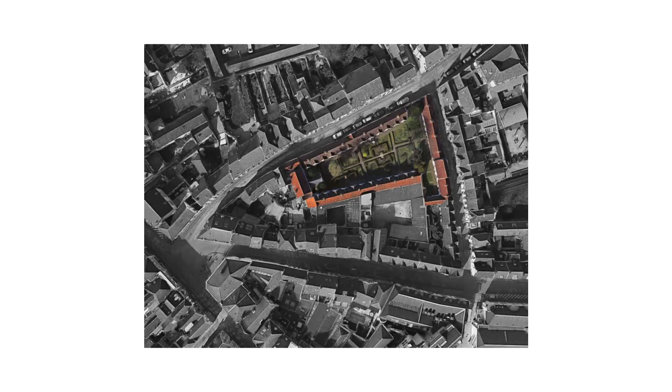But within that city fabric, within the urban block, is carved a space, a very calm space, a very strong space. So it's at once part of the city, and at the same time it's something which is quite unto itself. It's a kind of city within the city. And here's another example of this idea. This housing scheme in Brussels has a kind of wholeness, a kind of connected, collective sense of one.

And I think in my mind it's a kind of promoting the collective above the individual, without denying the individual a sense of, let's say, special individual character. And this is quite something in cultures like the UK and Belgium, nations where a sense of individuality is held very strong. City of houses, both London and Brussels, cities of houses.

Perhaps it's a different idea in places like France, where the collective was somehow much more recognized in the 18th century than it was in our country. The idea that people know they have to organize things in a way that serves everybody. I touched on this, but this theme is really about tolerance. As architects, we design things, we fall in love with them. We can be rigid sometimes, like I don't want my project changing in time. And I really like this photograph because, as you see here, it's a set piece.

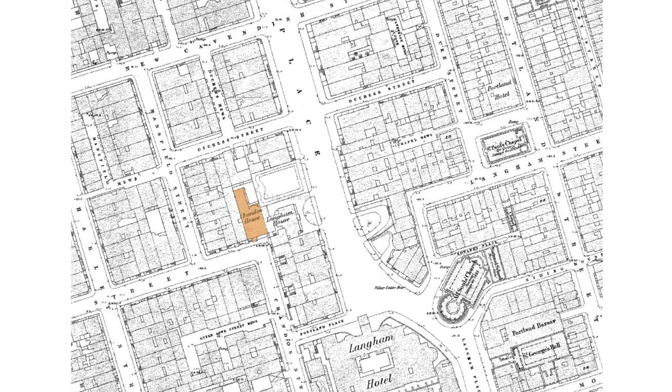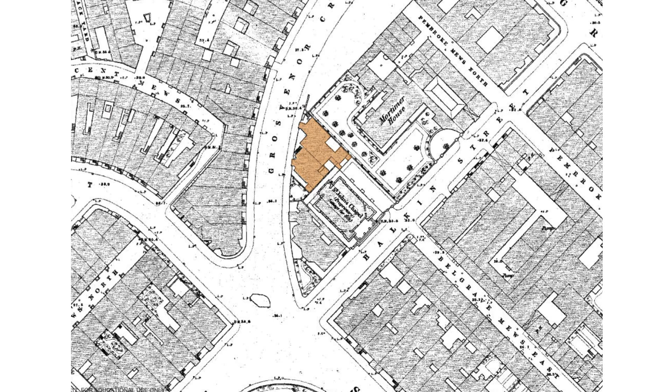And I would describe the way in which the facade has the power and the possibility to give direction. It tells you something's happening at the end of this street that's not what you might think. Here's another example, the Belgian Embassy in London, where when you see this plan, you see how the building is part of this more or less grid of building forms, but is then cut by Grosvenor Crescent. The architect was looking for ways to adjust his building to the street, and he does this just by this very sleight of hand turning of the porch. So these are not big ideas, they're obvious ones, simple and subtle touches between the act of building and the city.

And then I just wanted to also say that sometimes buildings can give our cities things, and Alberti knew that in a way. It's wonderful. I'm sure you all know this building, but the wonderful way the pilasters drop down onto the plinth, and the plinth, of course, is part of the pavement and the seat.

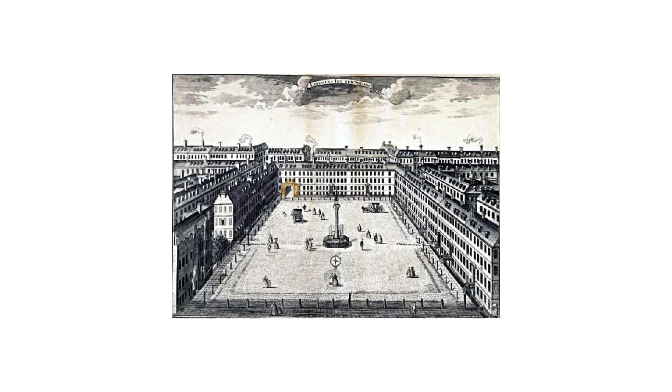This is a very nice urban example of architecture gifting the city something very special. This is, if I just go forward 2 slides, part of the law courts in London. So you have this great, beautiful court. Then in the corner, you have a little passage that connects to the rest of the city here. And here the architect, regular Georgian facade installed. There's a bookshop, and the bookshop is essentially a lining to a passage.

And it's very clever, really, because it's sort of obvious, but clever, I think, because the passage is gifted, let's say, the presence of luminance at night and its interest, you could say. And the bookshop is given this fantastic decorative entrance through this otherwise very ordinary piece of London facade.

And then, almost finally, well, lots of architects have used this phrase with these two words, but I like this, and it sort of feels like it should be of our time. We live in a period of gross excess and vulgarity, and I think practicing architects today, we're confronted by the problem of having too much on our plate. Materials in the 19th century, the 18th century, you would build with brick if you're in London because that's what you had, and you would make sash windows because of that.

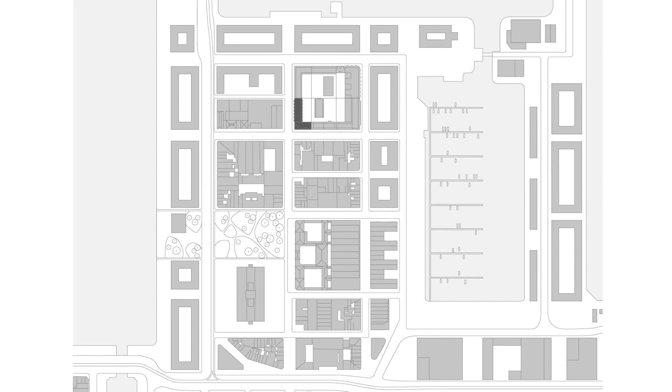And there was a very nice master plan produced in 2001 that sought to somehow hold on to the spirit of this dock workers neighbourhood. So here you have the dock and the other dock, and the centre of the city down off the bottom of the page. And we won this competition to make a building, a corner building. It's an urban building. This neighbourhood is not the most amazing architectural place, but it represents, I suppose, a time when warehouses or storage buildings were more than simply boxes.

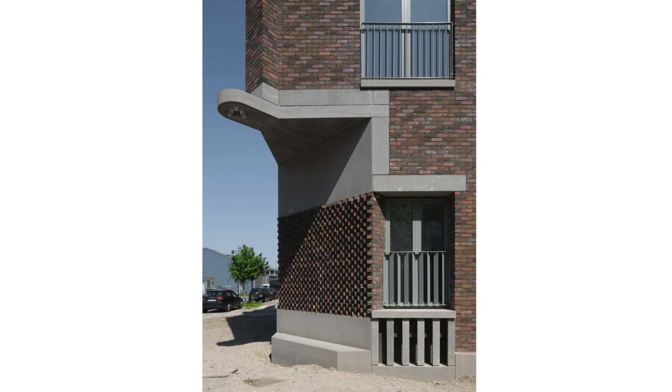They had a pride to make something with the simple facades, and these pictures just give a sense of the existing place that was undergoing a lot of regeneration, a lot of new buildings, a lot of architects working in this neighbourhood. And we like the really gritty nature. It reminded me of Tribeca in New York in the early 80s, these cobbled streets, these very wide streets. The light is really sparkly because of the light on the water. And then these somewhat disused buildings. So we got to work on this housing building.

It's essentially an L-shaped building, so it occupies the southwest corner of the block. It's essentially a series of houses, 3-story houses with 2-story duplexes on top of them, and an apartment building here entered from the corner. And the transition between these two typologies comes together in this seat and this light for kind of teenagers hanging out or whatever.

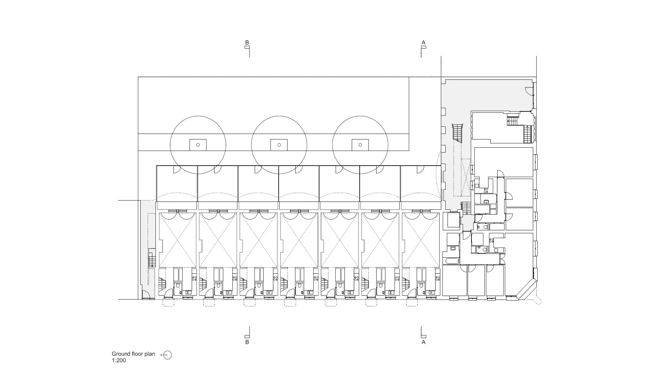And really, this seems obvious, but we were not asked to make entrances on the street. The brief actually was for an apartment building, but one of the things we enjoyed doing was to try to make a series of houses with front doors and kitchen windows, and that the pavement comes directly up to here. It's not quite finished in this photo.

So what you're looking at here is a series of 3-story houses with duplexes on top. And there's an interest in my office in finding a way to take this program and compose it in a series of arrangements. So what you're looking at here is actually the expression of a 2-story volume behind this facade. Two tight levels. You see it clearly in this section right here.

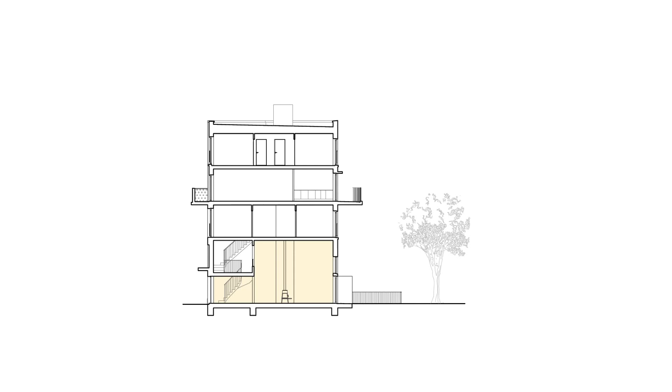You see, so there is the street with the canopy, and then you have a kitchen which is very squeezed, and then this big space at the back onto the garden, and its bedrooms on top, little study room up here, and then another duplex up here, accessed from the deck. They hate deck access in London. You're seeing an image here. It was very difficult to convince them it could still be a nice thing, because deck access had a lot of bad press in the 70s and 80s.

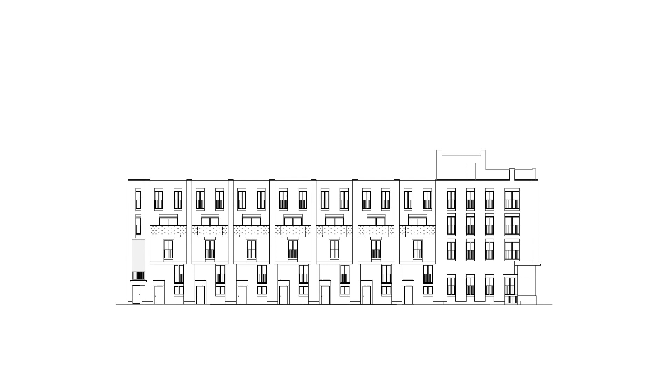So you're looking here through this double height space into the garden at the rear, and the entrance through to the back. So here in this long elevation, you're seeing these houses. These are 3-story houses, duplexes, then returning to the corner.

We like to work a lot with models in my office, as my students here have seen this week. I like to make models myself still. I think it's an important tool for architects. I know it's not very fashionable anymore with the use of computers, CGIs. All my friends say to me, why do you bother? Because you can do the same with CGIs. And you kind of can, but there's something about the process of making and thinking that's slow.

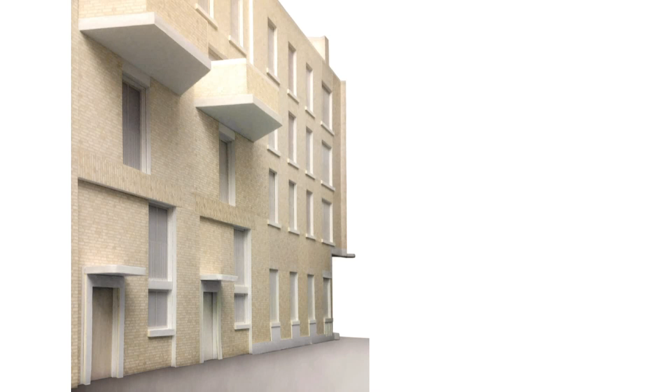And we're all having to work so fast these days. I like the idea of making and changing your mind, and also looking at models is very different to looking at a one-point CGI. Now, I know you're saying, well, you could do a video fly-through, but again, I think there's something very special about holding a physical thing and looking at it from different vantage points.

So this is a view of the building on the corner, where it transfers from houses to apartments and rises to a series of apartments on the roof with this, you could say, castle-like top. So it's a city building that's trying to, in a way, gift back to the city something in the form of this. I mean, I have to, you know, acknowledge the Amsterdam Dutch School.

A bit louder? How's that? Is that better? Is that better? Everybody, wave. Can you hear me at the back? Wave if you can't. Good.

Amsterdam Dutch School. I'm not going to go there just now. Right. So, more of that. They were amazing architects, in a very brief period in history, and they worked a lot with models, and the way they shaped form out of brick was, for me, one of the most extraordinary periods of 20th century architecture.

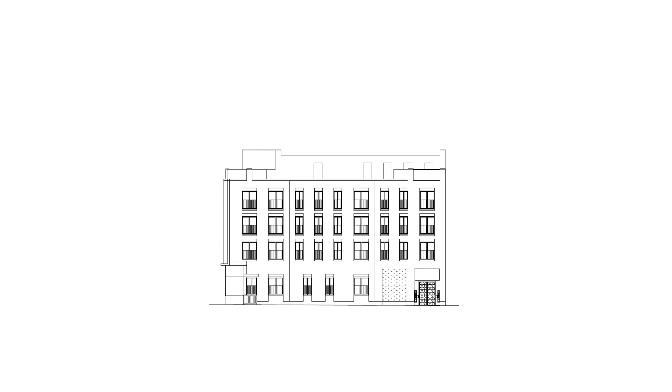So here you're looking at a drawing. I still love flat drawings and elevations and plans. In the school where I teach in London, it's very unfashionable to make two-dimensional drawings. But they say things to us that 3D images don't, I think. A plan can contain ideas that an image doesn't. Somehow you can thump an idea forward with a plan. I'm not saying it's the only way, but it's certainly still a very important way. My colleague said it's a bit tedious to show plans in lectures. But anyway, I won't leave it on the screen too long.

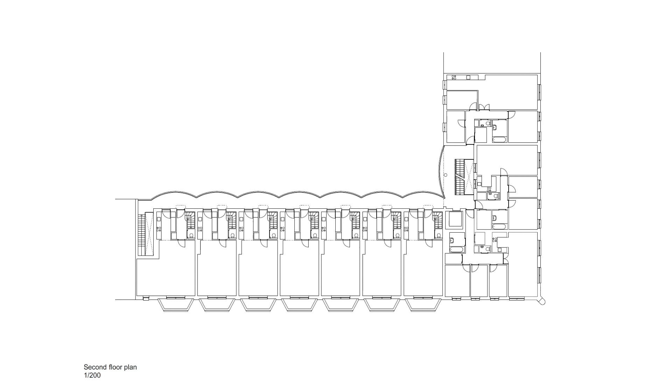But this is the plan at the upper level. You saw the plan at low level. And at the upper level, you see this deck access feeding the first level of these duplexes. And there's a view of it. And looking back into the apartment is access from a kind of Golden Lane style, generous deck space.

And the idea about these, that's looking back there, the idea about these decks is they're very deep. So they not only give access to the apartments above, but, maybe if I go back to this, in plan they belly out in this manner and allow a kind of swelling in front of the entrance for a kind of informal appropriation of the space. So there you're looking down at the back of the three-story houses.

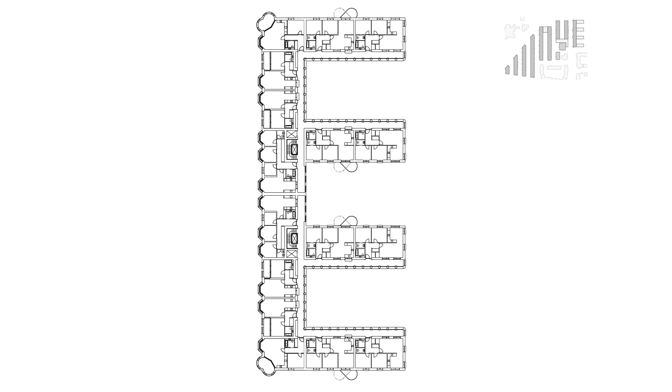So I'm going to race through this one. At the same time as doing this project in Belgium, we've been making this master plan. My office is doing very small projects, but also large-scale master plan projects. And this is a master plan for a part of London up here. It's called the Nightingale Estate. It's a project that seeks to make streets and squares and terraces. It sits here in Stoke Newington in London. It has a little square here and a big square here.

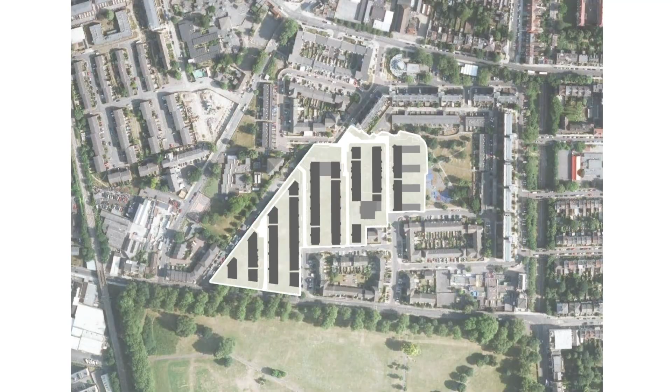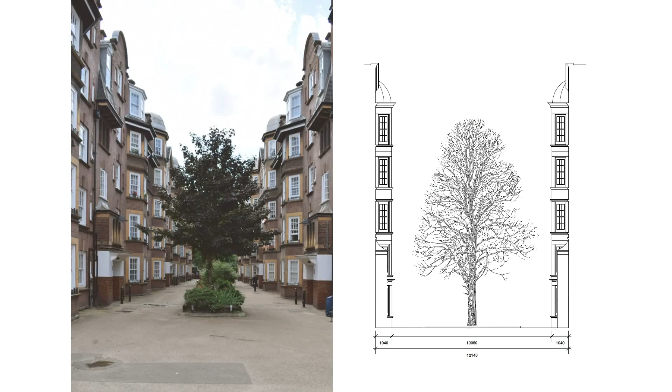I have to say, there was a great period of mansion block building around the turn of the century, when London's developers and politicians were looking to increase housing, and in some ways it's looking at this period. These are some very beautiful mansion blocks, it's called the Samuel Lewis building. But the site that we had used to have these towers on.

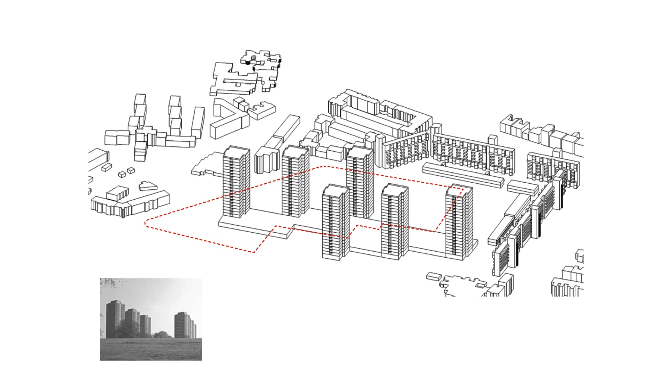Actually, they were not bad, these towers, but there was a lot of crime and trouble on these estates, and they became very unpopular, and the politicians decided that they have to be taken away. But the new project should seek the same quantum of development, but without towers. So this was before I got involved in this project, because I might have protested, this is not very sustainable to knock buildings down like this. So they were taken away.

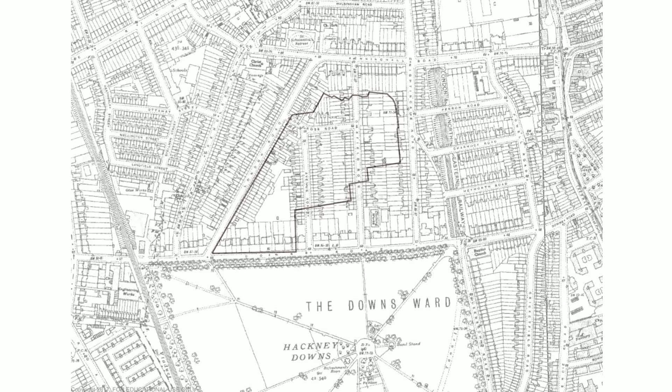Here is this site. It's in the London Borough of Hackney. Here's the City of London. And it's interesting to look at this piece of city. At the turn of the century, it was already a very dense part of the city. This was bombed during the war, and the towers that you saw were there. And so I suppose in a way our vision in this project is to return to a kind of tight grain idea of, let's say, a distinct piece of city.

The existing site is very characterized by a great variety of building types, everything from towers to slab blocks to small terraces. And what we felt this project needed was something very clear and strong and coherent, even though its edges were somewhat irregular and arbitrary, just given the plot. We thought it could be a new vision for how all this would develop in time.

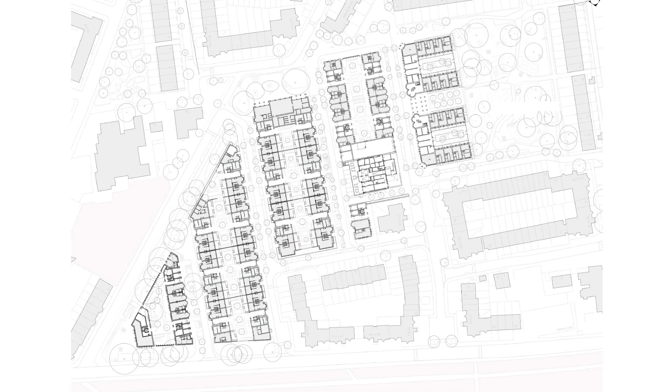So it's essentially quite an unforgiving series of north-south streets, meaning the apartments get east and west light, with south faces here onto the park, and then a building that has these east-facing gables onto this little public green up here. And some of the ideas that I was showing you in Antwerp are at play in this project, in the way that this is a primary route through the estate.

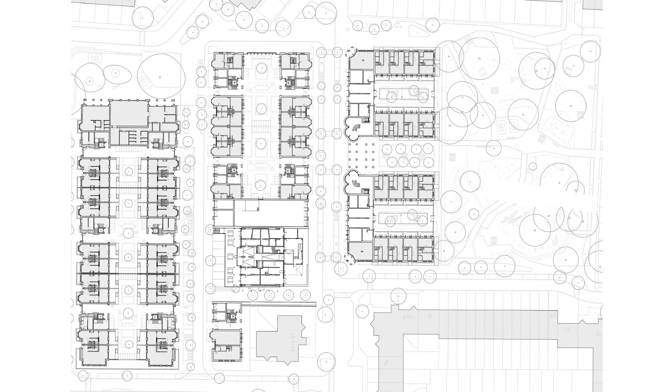But by the way, one tower, I didn't mention that, but one tower had to stay, and there is this weird absorbing of an existing tower here that's then held and contained within this block. But a principal route, the building here is orientating east to this park, making a series of little courts here, a series of little articulations. This is a public route through, whereas these are semi-public.

So on the outside of the block, I said it's north-south, and so you don't see it in this plan. There's a series of bay windows down this side, giving a kind of southern orientation. So again, using models to study these pieces of architecture.

Here we have, we've been talking about non-referential architecture the other night, and this is really the opposite position, and somehow everything's been done well before. As a new generation, I don't see how we can help but to kind of touch it.

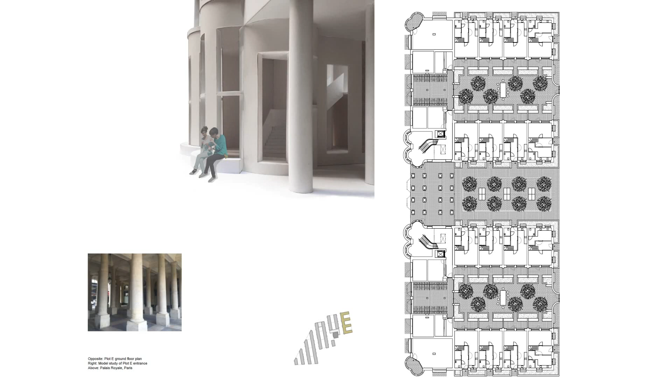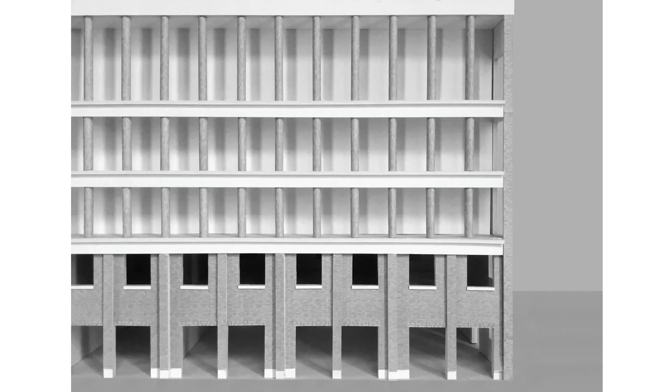And so, you know, this is the Palais Royal in Paris. This is my Palais Royal moment through to the garden here. It's the outside of the block with balconies and corner articulations. This is a cross-section you see in this diagram here through one of these courts. So this is a bit like the Belgian project, a series of two-story houses with a series of apartments on a kind of gallery deck here.

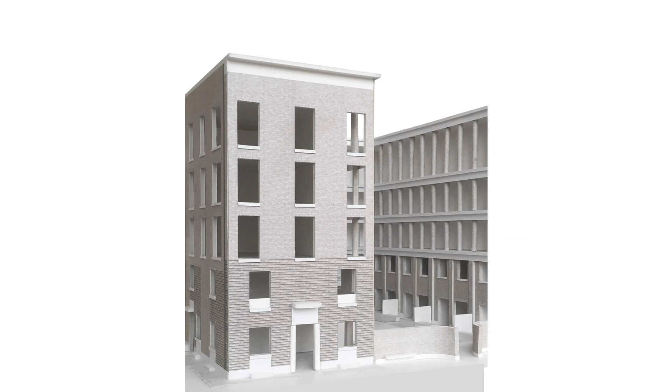This is looking through. These are all brick buildings. These decks are very deep and they allow informal occupation. So there's the elevation. So I'm really just focusing on one of the buildings in the master plan, the one that orientates onto the little square here.

And there's a view looking onto these gardens. This is a semi-private space belonging to these residents. So you have two of these that sit next to each other, and in this model you're seeing two, but there are four of these gables that orientate here onto the park.

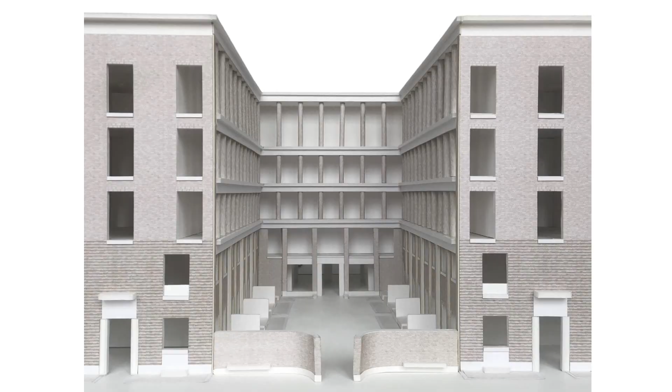Connected, similar. This is a different project, but there's a lot of the same themes at play. It's a master plan and the development of 900 homes in part of North London. It was a commission we received 2 years ago. It's a commission that we are collaborating on with two other practices in London, Sergison Bates, Allies and Morrison.

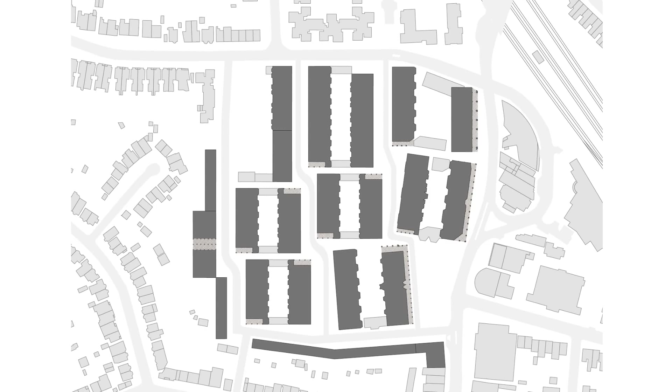And so what we're seeing here is a theme in the master plan about the way buildings react to junctions. So it's part of a big London-wide mayoral study. We have a major housing crisis in London, and this will be one of the sites that is there to deliver a large number of housing. It's right on the railway station, so it's 10 minutes here to Euston.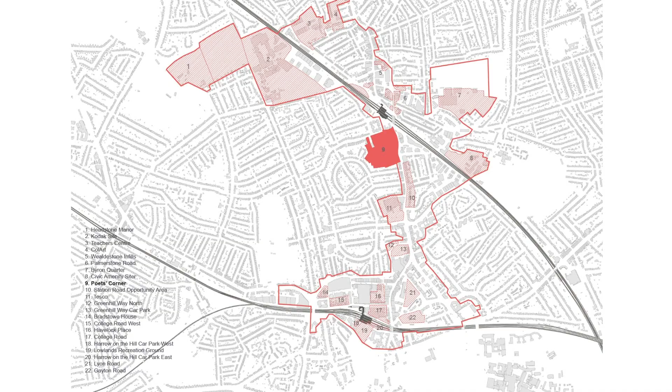So because of that, it's classified as a site that should take a much greater density than it's had in the past, because what you see around here is really a kind of suburbia. So it's also a kind of city within the wider city, and the characteristic of this city is predominantly 5-story

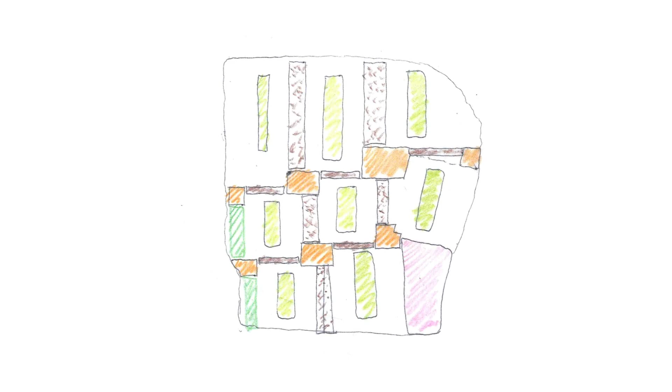urban buildings. And here is a drawing that tries to articulate this idea of the buildings here in purple, and they step, and you get these kind of knuckle points, these shared spaces where the buildings have to perform in a way that perhaps they don't have to perform on the long elevation. So they have to really rise to the occasion, at their moment in the city.

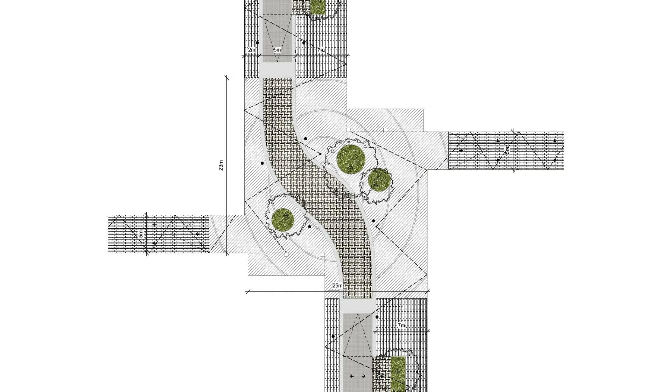It's a very complex project. It's going on. It's probably a 5-year project. I'm really just skimming the surface, but there's a lot of input from transport and highways, looking carefully at how cars move through this space, how to accommodate cars. So here you're seeing some of these little moments in the buildings where they sneak forward.

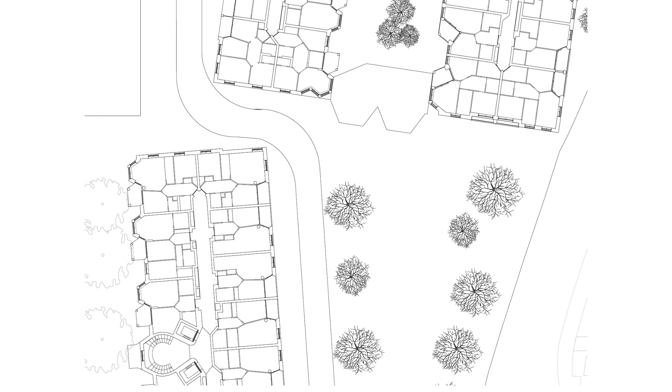So phase 1 of this 1,000 homes consists of these 5 buildings here. And these 5 buildings are about to be submitted to planning next week. Here's a zoom in of that bit. So you're seeing a building here. These are by different architects. This is by my office. This is by my office. This is by Sergison Bates. And the one just up here is also by Sergison Bates.

We're wrestling with how to, these are building designs, but space designs. We're very interested in these mansion blocks from the 19th century. This is Norman Shaw, fantastic apartment building overlooking Hyde Park. Here's an elevation of the southern building overlooking the square. All the east-facing buildings have arcades. They're all made from brick and precast elements here.

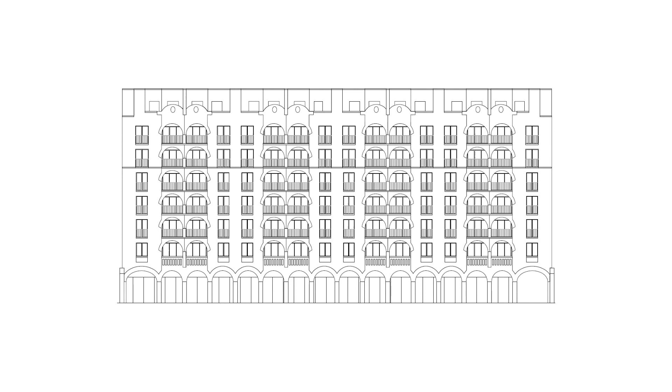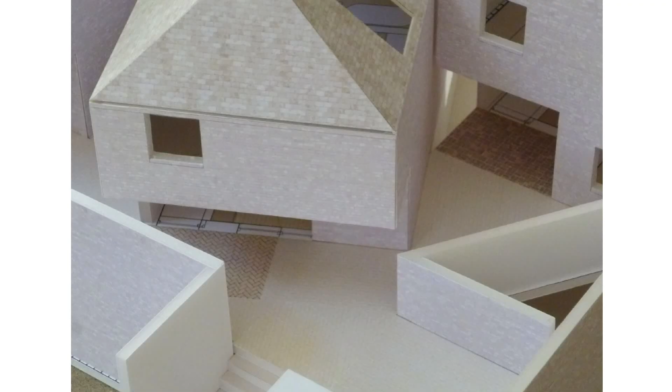So I'm going to move scale. This is a small project. We call it Moore Park Road. It's also in London. It's in Fulham. And the spirit of this kind of urban intimacy is at play in this project. It's a small project for 4 houses on a ridiculously small and difficult site.

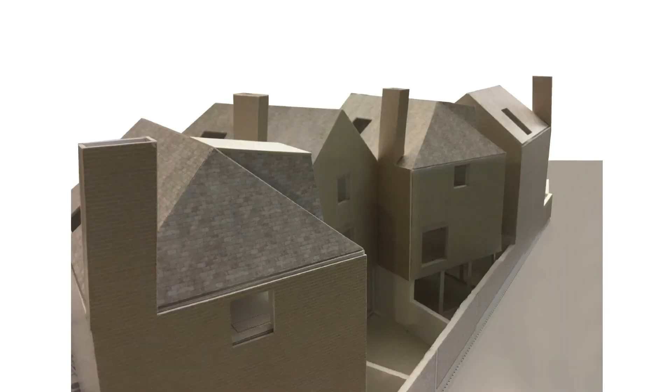You see 5 houses in this model, but then we were told we couldn't do that by the authorities. It's too much, overdeveloped, blah, blah. So it's now 4. And it's a series of houses that sit cheek by jowl. And I suppose the spirit of this project enjoys, you could say slightly nostalgically, the world that used to exist in these inner urban blocks.

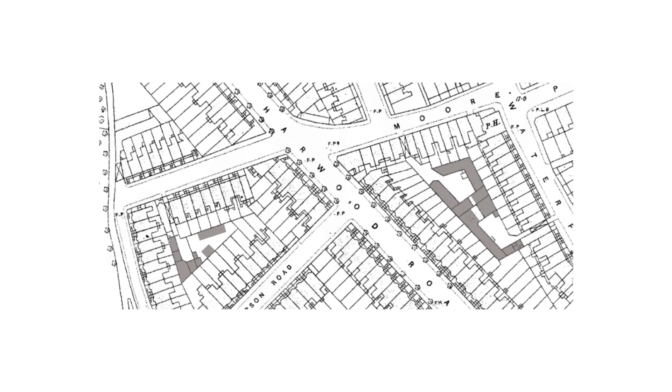They were workshops, and they looked a bit like this. That's how it used to look. So gaps and buildings, informal buildings, all a bit cheek by jowl. And our client bought this site a long time ago, actually. So he's held on to it, and now he's developing it. So it's been on site for 6 months. In fact, this project, I'd say it's kind of ridiculously impossible.

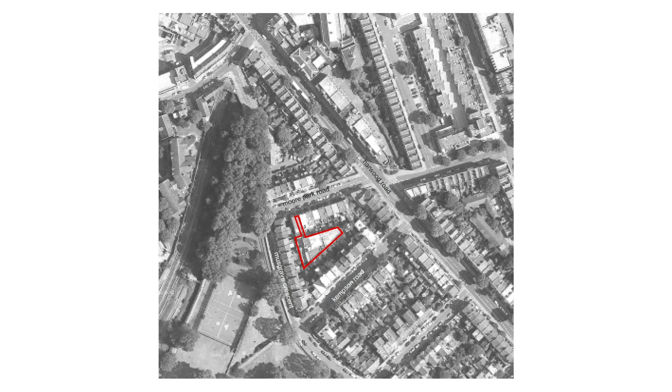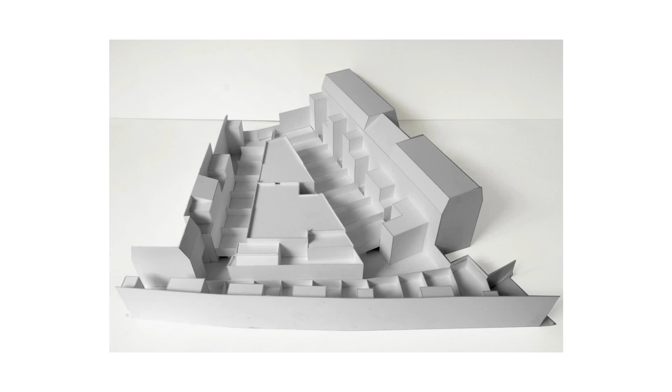You access through this little narrow passageway that you saw in the first picture, and you enter into this triangular plot, which was built previously. So over the century, it's been built, and when we got to work on this project, this is what existed on the site. It was essentially all built. It had accumulated ramshackle buildings. So we thought about a concept where we take pieces away, and our client wanted us to build houses, not apartments. That was the only economic model for this.

So we developed this idea that we would remove bits, not literally. In the end, they're new buildings, but we would take pieces away and enjoy the gaps between, and generally put the gaps on the southeast, southwest side of the plot. So there you see an aerial view of what existed. This has all been taken away now. There's 5, but now 4 houses. So here's a plan, 4 houses. Access through here. They're 3-story houses.

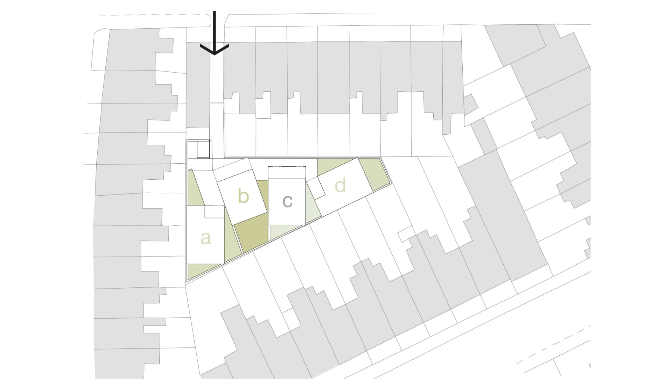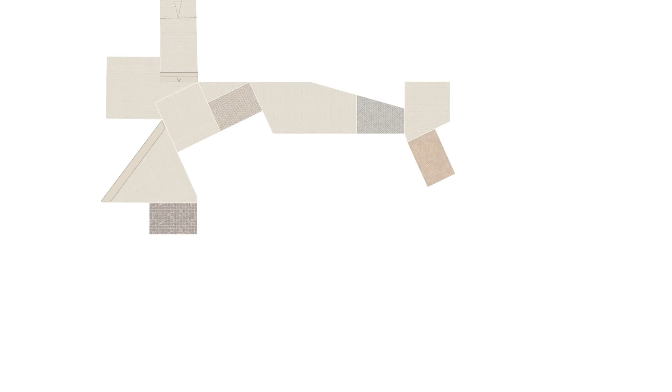This is a plan at the middle level, so you enter in the middle. You enter onto this common brick surface that should be very beautiful, trying to recycle some of the material that came from the existing building to make a series of, let's say, carpets. And these carpets are brick carpets that would, I should combine those drawings, I don't know why I didn't do that, but they would bring access to these dwellings.

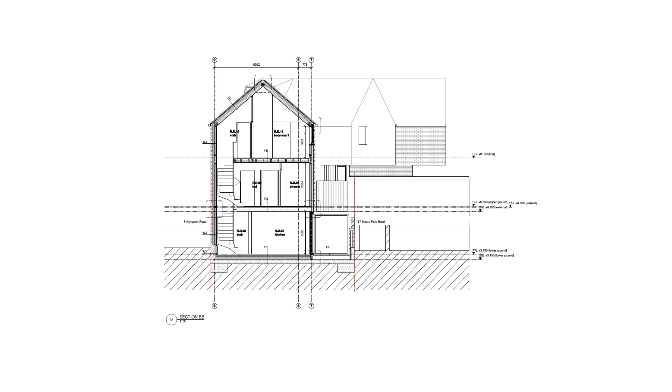So here's a cross-section. So in fact, the lower level cuts into the ground a little bit. The land around the site varies. So you've entered into this level, so you go up to bedrooms and down to living spaces. There's the living spaces. So actually, although there are 4 separate houses, you could also describe it as a kind of horizontal apartment building that at this level is all built, but then pops up. At this level they join together.

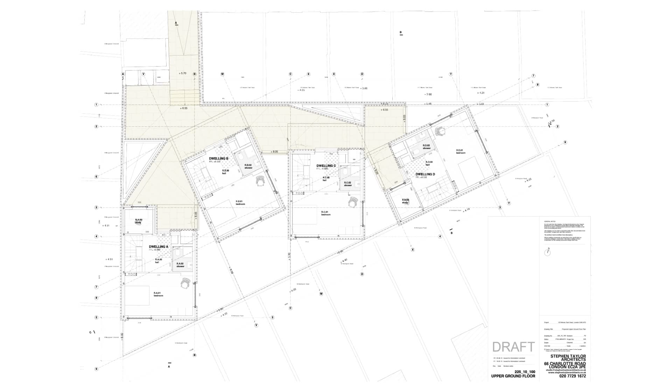So here's an early model study. And there's the upper level. So it's a very simple plan of two bedrooms. And they're brick buildings that have white bricks at lower level, and these 2 bricks come together in these tight courtyards, which are very small and difficult, you could say. So this project,

how am I doing for time? 1 or 2 more? Okay, stop me.

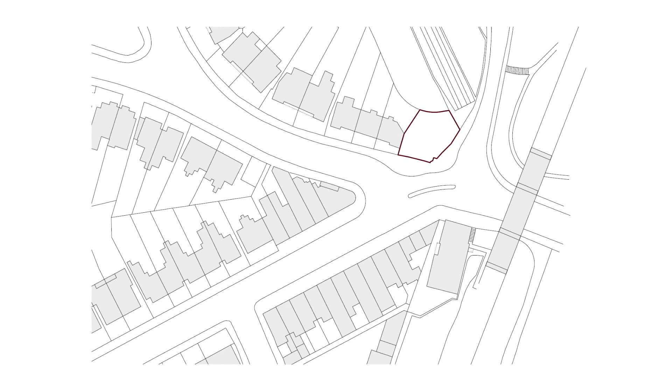But now with modern piling, it's deemed a building plot, and so our client bought it, and the regulations allowed us to go a little bit closer. So here you see the project in plan. You see how it's like the tail end of this street now. And for me, this is an urban project.

It has an urban aspiration in that this road junction here is a very unpromising site, with all these roads coming together. Not major roads, but the opportunity to build on this corner was one to compress the space a bit more, bringing the building face right to the pavement, finding devices to deal with threshold because of bringing the buildings to the face.

The planners wanted us to push the building right to the back and have land in the front, but we argued that that was not good for the city or the urban junction. It would be better, it would be more exciting, more contained, more dynamic somehow if the buildings could come forward.

You enter, if you're coming from the south, you come under this railway line here, like that, and then you're met with the corner. So here it's continuing the terrace, turning the corner, making a little tower-like experience. Now you see turning the corner here. It's an early model study.

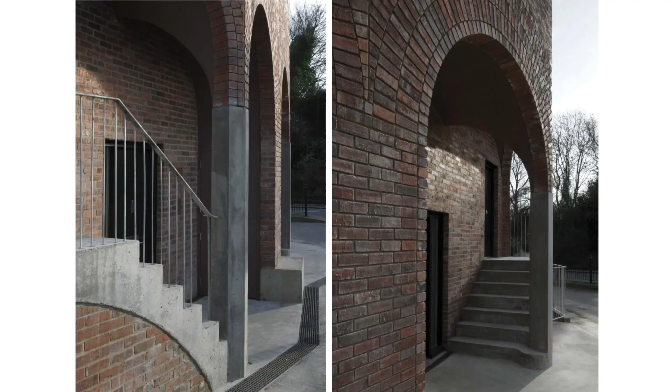Here you see joining up with the existing buildings, making a little friend here to this character, playing with this language. This neighborhood is Edwardian, not Victorian in fact, so it was all built around 1895 to 1905. It was built not with architects, but developers who were following patterns and techniques.

This is a particularly nice one just up the road, where you have this entrance and this living room window all kind of contained, embraced. So we tried to do something like this. There you're looking at the back. The backs were always a bit more irregular, and the chimneys, they have fireplaces with wood-burning stoves here at the bottom.

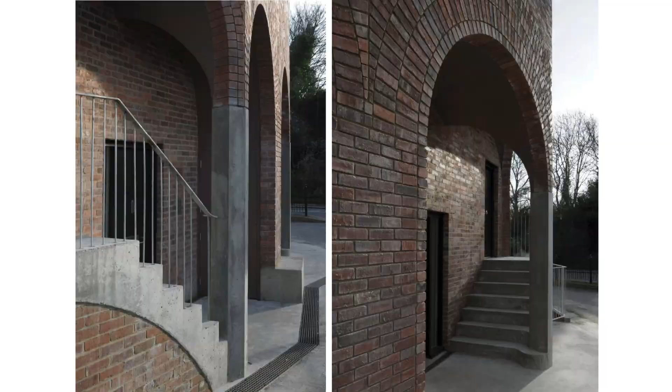And they all have, I didn't really speak about it, but they have double height. Our client's called Solid Space, and they have a kind of preoccupation with split level, which we don't. But they were pushing very hard that living, dining, kitchen should somehow, it's a very small plot, this, but he pushed us to try to, you'll see in that image, maybe it's coming here, to try to make spaces that would interact with each other across a level change.

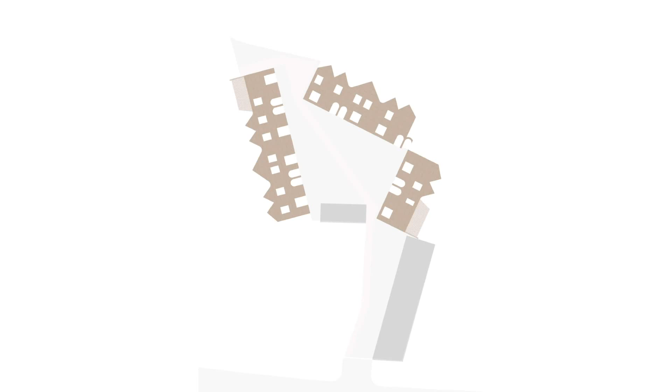So here you have the kitchen to the left, the dining, the living, and that was the quality he was very keen on. That made for quite complex staircases, especially on this irregular and difficult shaped site. So I think I'm just going to race through that one, but this is another kind of city within the city, very small. It's a kind of beguinage.

It's a series of little houses, a bit like this one, that wrap a small space. It sits in a kind of wilderness of strange city that's not very urban, quite suburban, busy road. And what we wanted to do here with our clients is to really push the buildings to the boundary of the plot like this. You enter through here and make a little court, like a kind of courtyard space, so you have lines of buildings here and here and here.

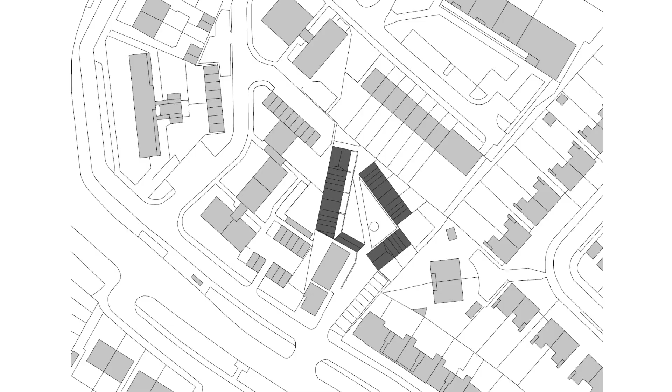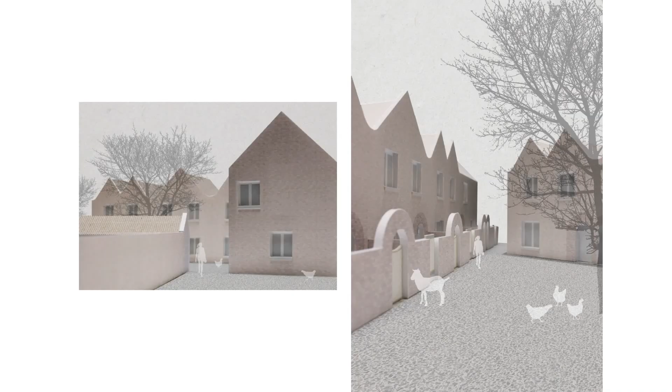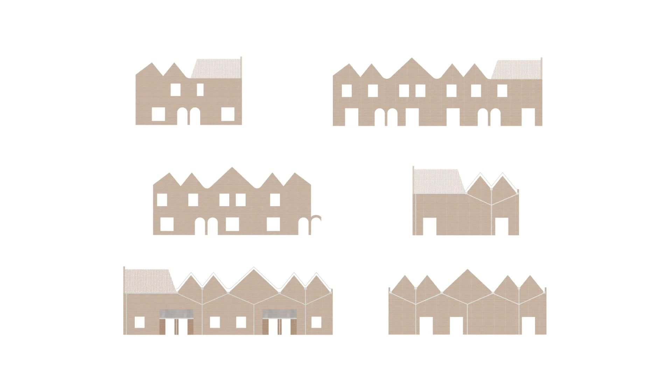And there's a little game between the groupings of the buildings. So here you're looking at 4, 1, 2, 3, 4, and the fourth is off the triangle, and the second is centered on the 3 on the triangle, so it makes this big gable. And likewise it's happening here in this group of 3, 1, 2, 3, and here you have the way in, little storage shed. And there's a plan. So this is just going on site. They're again simple brick buildings that play games with modest things like drain pipes, a real characteristic of London.

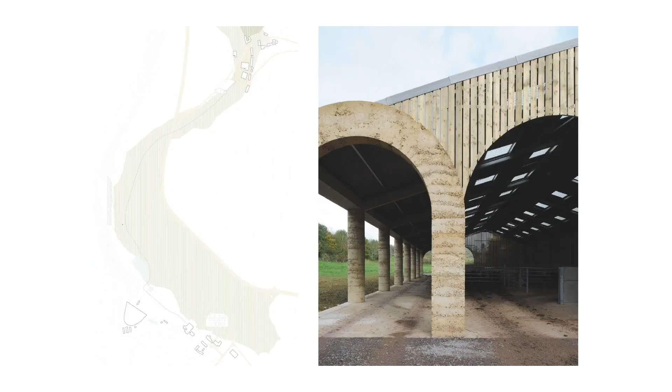It's the stone from the quarry, and it's mixed with a little lime and put into molds. But this project, why is it an urban project?

This is Peter Smithson's obelisk, that was the last thing he did before he died. And this drawing is not very clear, I'm sorry, but if you can make that out, this is Smithson's obelisk here. This is his house, nice house. This is the house. This is the kitchen garden, very beautiful thing, you'll see.

And then basically the estate has a valley, and it turns like this, and it swoops down to this farm. And we've been doing a kind of, I won't call it a master plan, but a kind of site strategy for a series of new buildings that would, in a way, bring other uses to this place.

And as I said, the client is a collector of drawings, of architectural drawings. In fact, I think he has a lot of Caesar's drawings. In fact, Caesar is making a little project here on these silos. And here's a little housing building, this cowshed, here's another building.

And this is a view looking through the kitchen garden, the obelisk, and the valley as it sweeps around to the right. And this building, for cows, it's a simple off-the-shelf cowshed, has a kind of Palladian-like barchessa that is the tractor drive, where the tractor goes and drops the... But it's more than that.

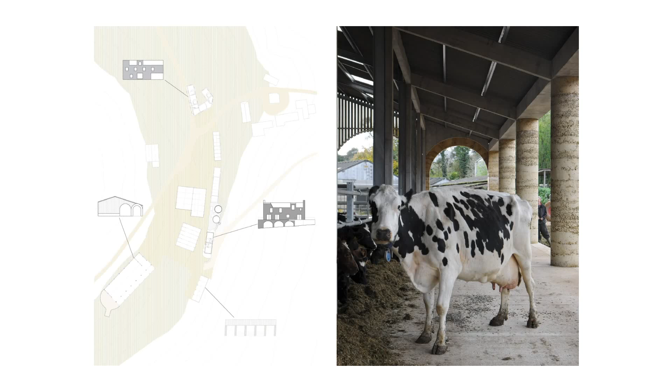It's a threshold between the landscape up to the main house complex and a threshold into the collection of buildings. So here you're seeing the cowshed. This is a piece of landscaping, and the valley is like a V, and there's a little river, not very present today, but a water stream that comes around here, and then it's brought to the edge here, and then trickles through the valley like this.

Here's one of the residents. It's nice to design a building that doesn't need insulation or too many regulatory things. We did a lot of experimentation in finding the right color and mix, and the engineer was very involved in compression of concrete strengths and so on, and we did this, we didn't like this, this is too much cement, this one's too much lime.

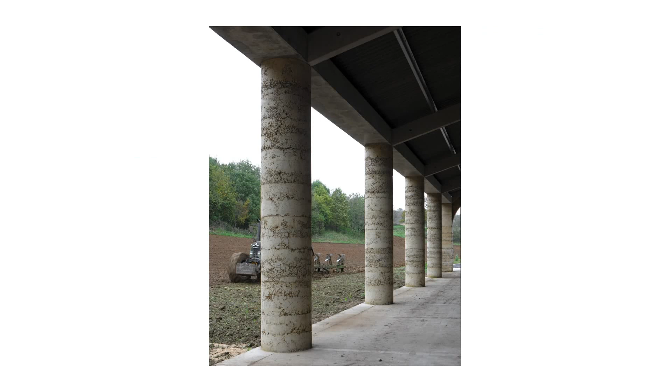So here's a view as you're looking to the face of the building, out. This is my Inigo Jones moment, where the colonnade meets the arch. I like copying things. I think it's quite okay to copy. I think somebody was saying the other night that you have to be new all the time and you have to invent. And I don't think that has to be the case.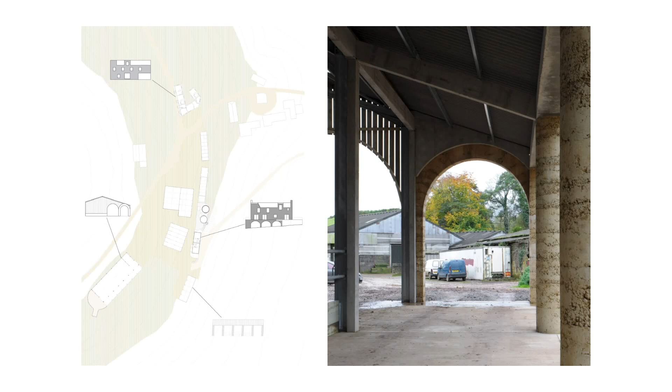I think there's too much obsession with trying to be different. You will be different because you're doing it now in your time, with your hand, in this age, with the conditions that we have. These are photographs by David Grandorge, London photographer, very clever chap. And then there's another building opposite.

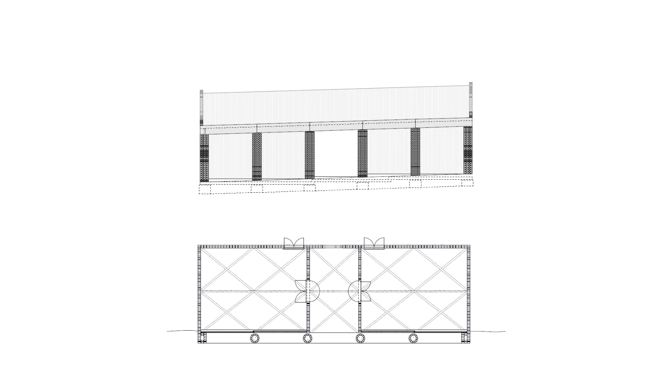So most of the buildings on this estate are stone, but some of them, the small-scale, human-occupied buildings, you could say, in the farm, not in the grand house, are made from brick. And there are brick fields not very far. And we were asked to make a little building here, which is opposite the cowshed, and it's a little storage building with two storage rooms open to the elements, also uninsulated, a central place for the vehicles and machines.

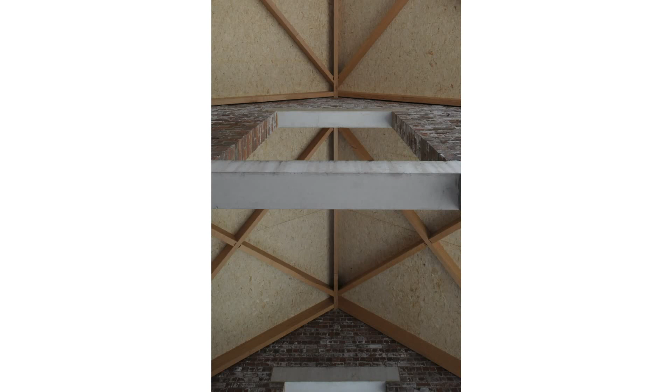And it's a brick building that has these interconnected spaces. I'm very proud of this, and I have to give credit entirely to the structural engineer, really. But it's what you would describe as an inline truss. So it has no bracing. All the diagonals, it's quite hard to explain without drawings, but these diagonals are in compression and tension at the same time. So whilst the roof might want to splay apart, they hold it back.

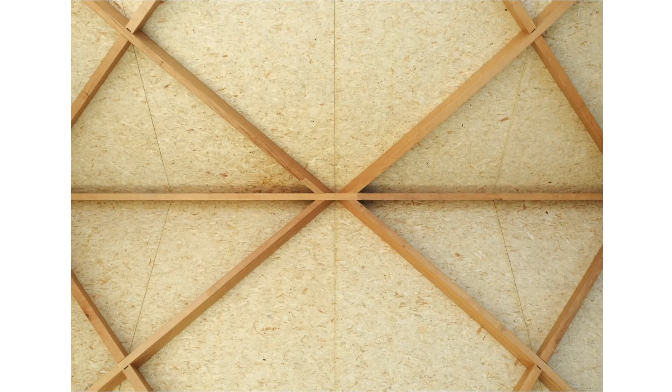And he thinks they used to do it in medieval England. So, and I think the other thing to say just about these two projects is they were quite unique in that the client had on-site people. So we had the possibility to experiment with things without always drawing them first. So we had a loose idea about these columns, but we just tried them on site and then found an arrangement we liked.

Okay. I'm going to stop there. That's enough. Thank you.